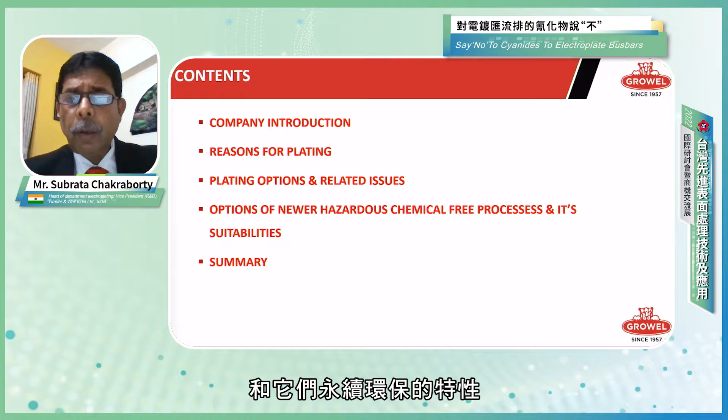Can you go to the second slide please? My today's talk will be outlined as: a little company introduction, reasons for plating, different plating options, and wherever there is an option, there are some issues as well. So we'll highlight some of the issues and the options for newer hazardous-free chemical alternatives and their suitability, followed by a summary slide.

Our company is situated in Mumbai, head office in Mumbai, with factories at different places, and we have 5 verticals. It was born in 1957, so more than 65-year-old... it's a company with 76 million USD sales turnover, with 35% market share for the GMF range of chemicals. We are an AS 9100 certified company with more than 1100 employees and associates working with us.

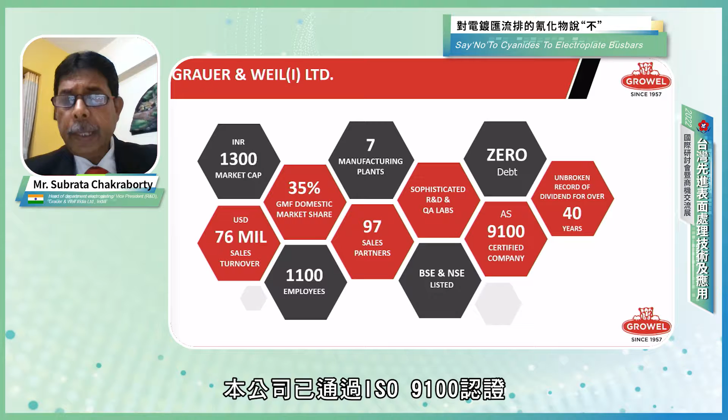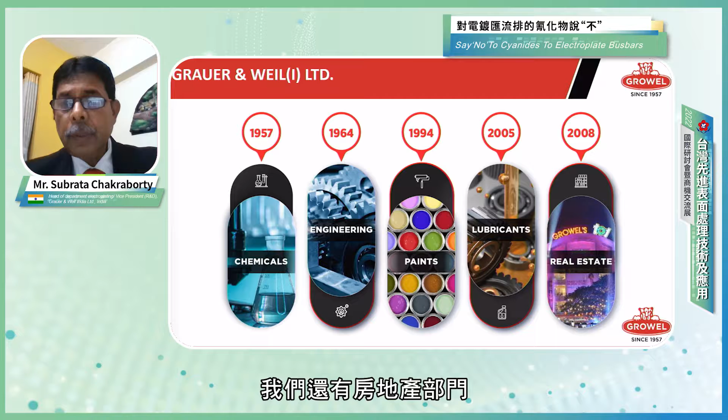These are the different verticals. In 1957, the chemicals business was the cash cow of our group. Then in 1964 we started engineering divisions supporting electroplating and associated waste treatments and other processes. In 1994 we acquired a paint company, a related diversification, and also introduced lubricants associated with metal finishing. We also have a real estate division, with a beautiful mall in Mumbai.

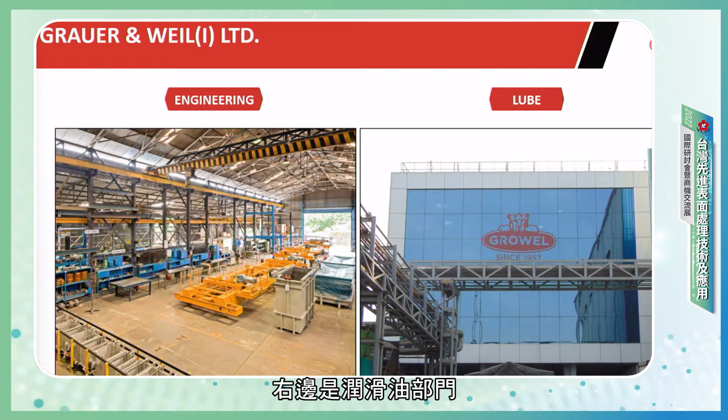We have more than 1100 direct and indirect employees on direct payroll with skilled personnel. Of these, 900 are technical personnel and 200 are in support functions. More than 70 people work in R&D and QA for process development. This is a short introduction about our company.

Next please. We have 2 overseas offices, in Thailand and Bangladesh, and different channel partners for both India and global supply chain positions. So this is about our company background. Now I'm moving forward to the next slide.

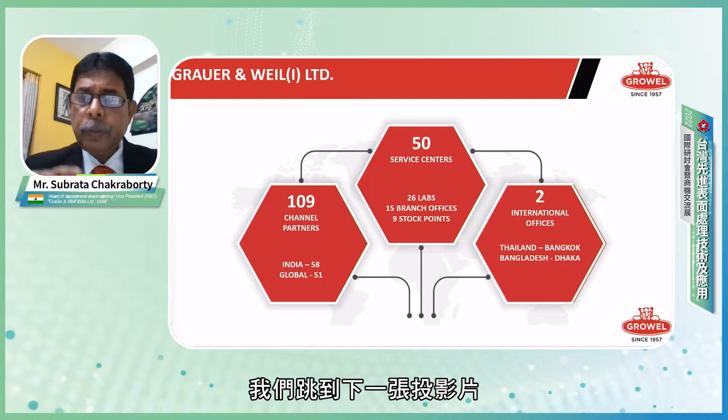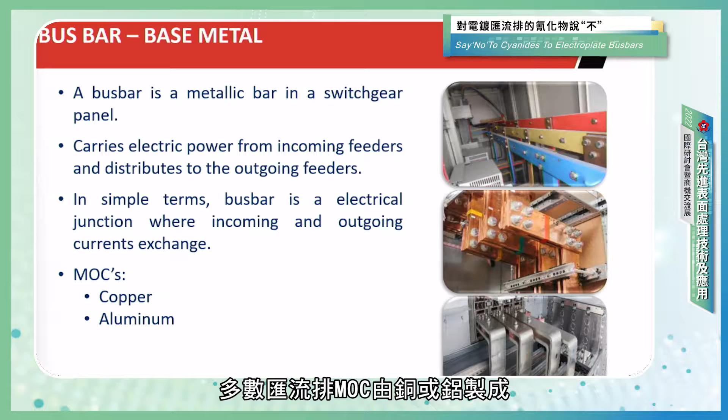This will give us a little background about the bus bar, what it is and where it is used. We are all aware that a bus bar is a metallic bar in switchgear panels, which passes current from incoming feeders to outgoing feeders. In simple terms, the bus bar carries the current, and most bus bars' material of construction is copper or aluminum.

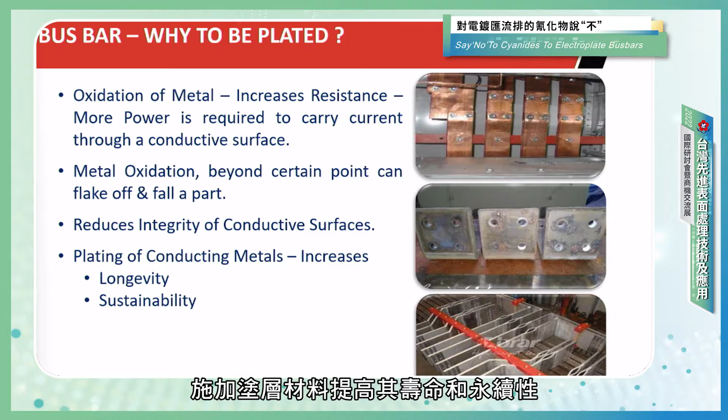The purpose is that it passes current, so if oxidation of the metal takes place, it will increase resistance. We then need more power and voltage to pass the same current, resulting in higher temperatures, and the carrying capacity will reduce. As a result we will see corrosion taking place, reducing the integrity of the conducting surfaces. To resolve this, one good option is to apply coating materials for longevity and sustainability. Let's see what the options for plating are.

It will be copper, silver, or tin, depending on the application, because whatever coating we apply should have good thermal conductivity. That is the most pertinent choice for the coating, so the best in line will definitely be silver.

Some cheaper substitutes are also doing only tin plating, with an undercoat of copper.

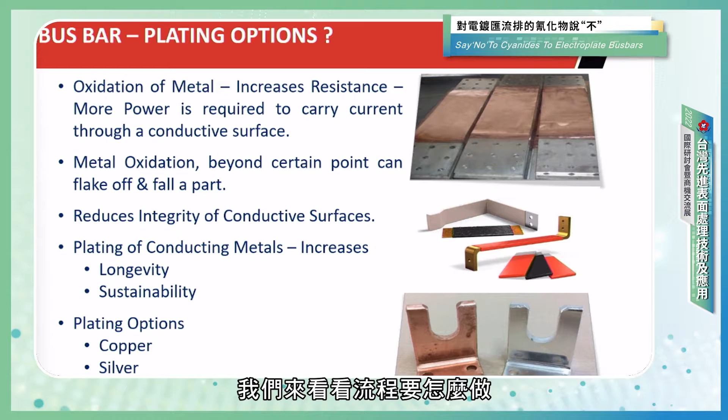Let's see about the processes we do. You can see some photographs of the plated components. This is the normal process sequence industry uses for plating on busbar while doing copper tin plating. It starts with soak cleaning, a specialized soak cleaning so that it doesn't age the base material aluminum. Then we have etching, then zincate 1, then desmutting, then zincate strip, and so on. Coming back to zincate 1, then zinc strip, then zinc 2, and then trying copper coating, and then tin plating, and then neutralization, passivation, and dry. So this is the process for copper tin coating on aluminum busbar.

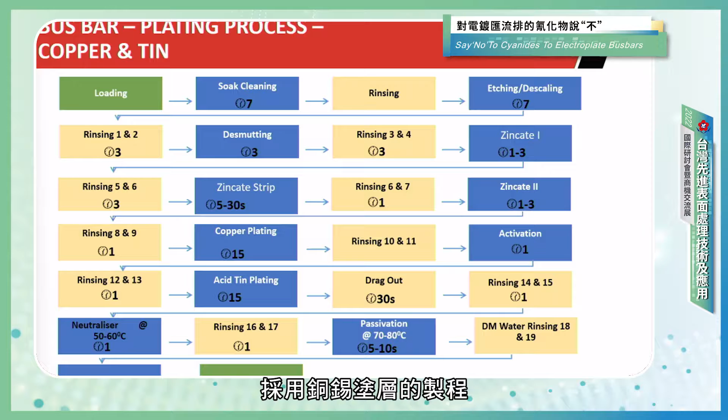Here this will have a copper silver variant. Up to the copper step it's more or less similar, and thereafter instead of tin they go to strike silver, main silver coating, followed by anti-tarnish and so on. This is the basic outline of the process sequence.

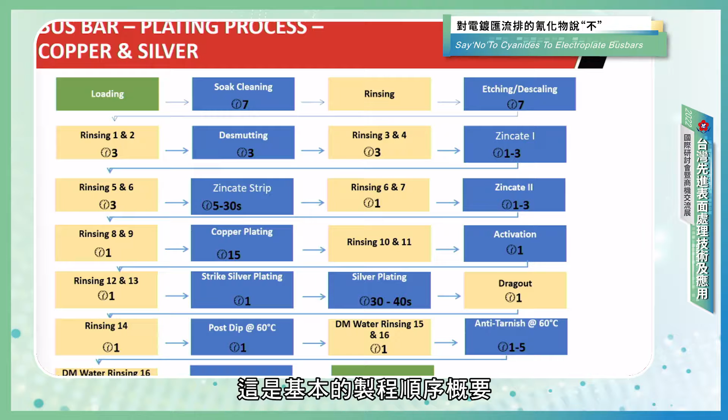Now let's see the challenges. As all of us are aware, in these processes like zincating, copper, and silver, the traditional processes contain cyanide. So our task is to replace cyanide for all the associated processes, so that we can make our entire process cyanide free. At the beginning, the main challenge was to find a suitable substitute for cyanide, because cyanide is a well-established ligand and gives very stable complexes with most metals.

Silver is so noble, with a standard electrode potential of positive 0.8, so thermodynamically it is very noble. But in the presence of cyanide, it forms silver cyanide as a complex, with a log K value around 21. This provides a very stable complex, and over the years it has become totally established, and people know how to use cyanides. But we all know the issues associated with using cyanide.

The choices for replacement of cyanides that we considered in our company were that the complex or ligand should not be toxic, and it should not create very harmful breakdown products, so that subsequent waste treatment of the generated waste would be easily treated and recycled wherever possible. So these were our basic approaches.

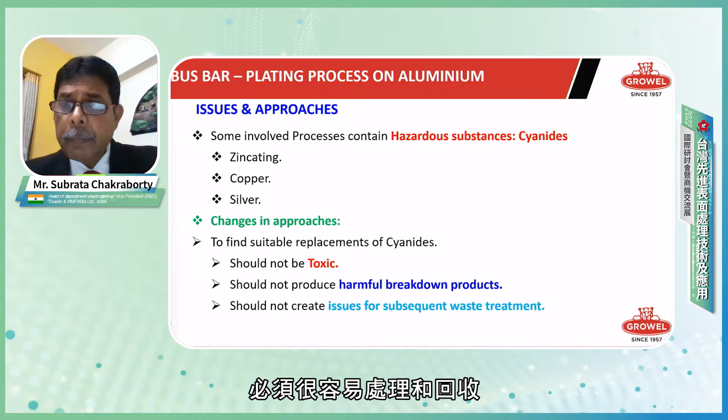Starting with the zincate coating, the conventional technology, as I said, contains cyanide as a complexing agent to hold alloying elements like iron and copper in solution. Because we are all aware, the zincate coating is in an alkaline media, and in alkaline media these comparatively noble ions like iron and copper tend to precipitate out. Therefore, cyanides are used as stabilizing agents to keep them in complex form.

The traditional process mainly contains zinc, caustic soda (NaOH), and cyanide - sodium cyanide or potassium cyanide - in the formulation. As a result of this zincate coating applied on aluminum, we get a zincate top coat which will be either zinc-iron alloy with zinc approximately 97% and iron approximately 2%, or zinc-copper with zinc around 86% and copper around 14%. This is normally the composition of the coating in traditional processes.

But what we have done is remove cyanide from the usage. Instead of cyanides, we have used non-cyanide organic complexing ligands, mainly dicarboxylic acid, or sometimes acids with even more carbon atoms - let's say quadra or hexacarboxylic acids - along with a cationic polymer and some multi-cation.

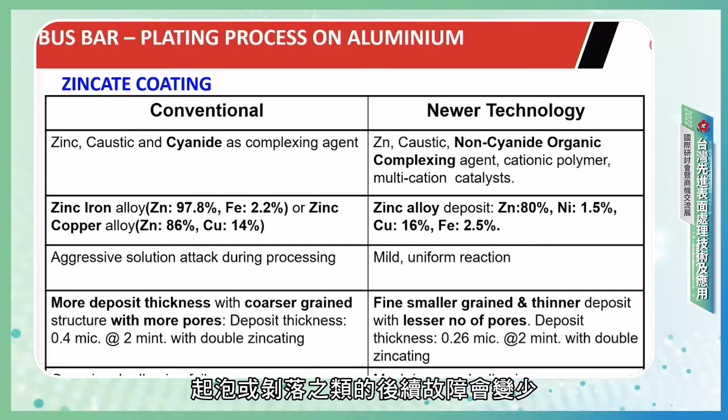Furthermore, being a true zinc alloy consisting of nickel, copper, iron, as compared to the traditional processes binary alloy of zinc and iron or zinc and copper, this is fairly less corrodable. For example, if we go from the zincate to subsequent coating processes, this deposit has less tendency to strip off at the contact surface or component touch surface. So it improves or ensures the subsequent deposit adhesion. With the newer technology, we can get better adhesion, so subsequent failures like blisters or peeling off get reduced.

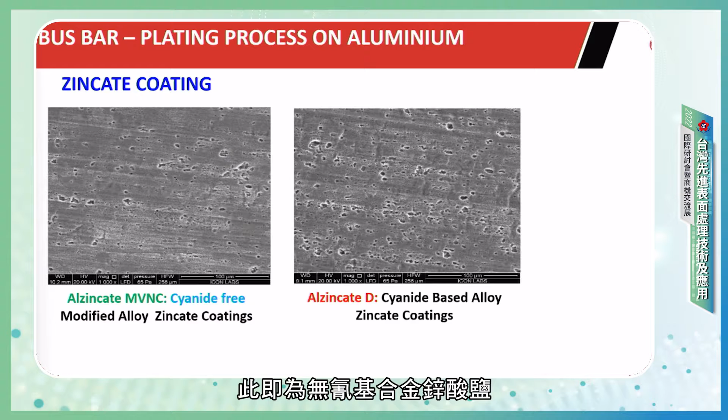This is the SEM photograph of zincate coating. What you're observing on screen is the aluminum surface followed by only zincate coating. You can see there are a lot of pores on the right hand side deposit, whereas on the left side the deposit pores are much lower. The left side coating contains Alzincate MVNC, which is the non-cyanide based alloy zincate.

Moving forward from the zincate coating to copper coating. We know there are three processes for copper coating: cyanide, acid, and alkaline. So on zincate coating, obviously the choice is alkaline ones, either cyanide or alkaline.

With the different options of copper coating, we have some issues. For example, in case of acid coppers, copper remains in +2 state, and copper's electrode potential for copper to copper 2 is plus 0.34, whereas iron is minus 0.44. So thermodynamically, copper is less active than iron, and there are always chances of getting copper metal deposit on the MS. This gives an immersion coating which is not very stable or adherent to the base. After deposit, if I just scratch it, that coating gets peeled away.

So this is an issue. Therefore, on a component like MS directly, acid copper cannot be used. Whereas when we talk about cyanide or alkaline copper, the metal remains in complex form, not as only single Cu 2 plus state as it is in acid copper. As a result, it changes the potential value and makes it more conducive for plating, and we don't get addition on the base, particularly on aluminum. So if we use either cyanide or alkaline copper, it doesn't give much issue as far as metal precipitation or immersion coating is concerned, and we get an adequate strike coat or base coat for subsequent deposition.

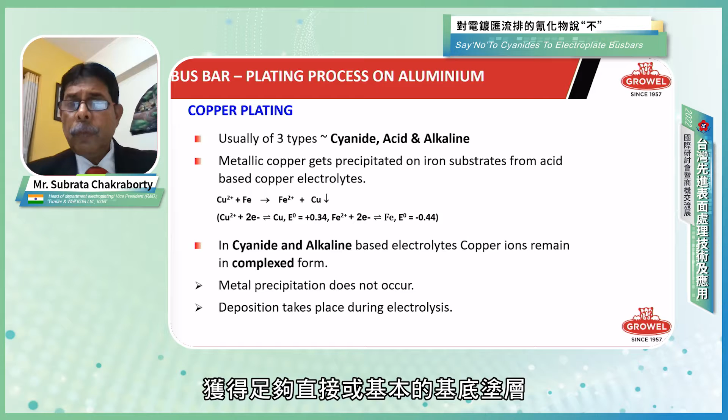Now we are not talking about cyanide copper, since it is well established and we are all aware of it. So what are the options? We have pyrophosphate based copper and phosphonate based copper. Both processes have some advantages and disadvantages.

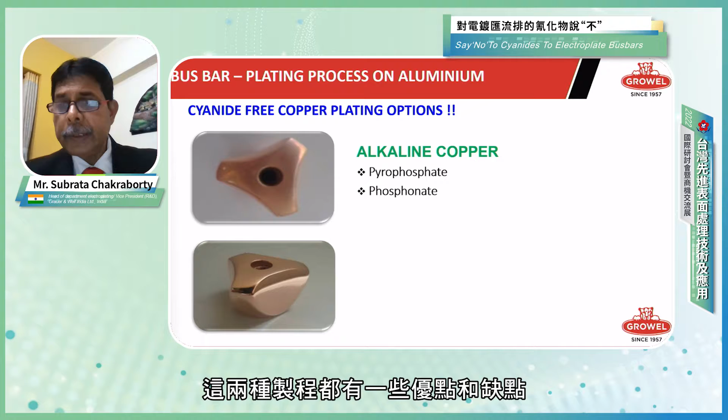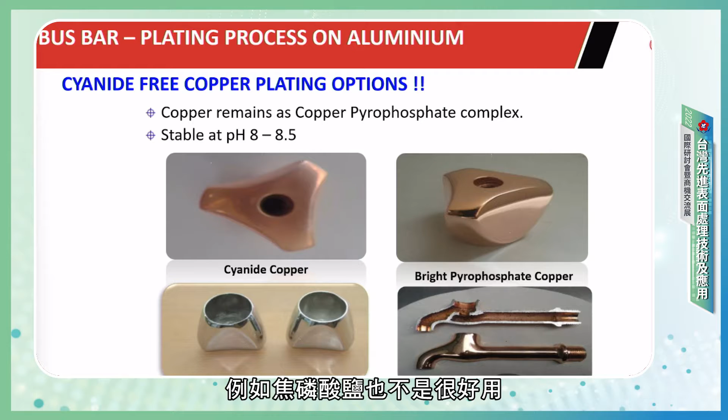But pyrophosphate is associated with some issues. For example, pyrophosphate is also not very user friendly with respect to waste treatment. And the most important thing is that the pyrophosphate ion has some tendency towards hydrolysis, forming single uncomplexed copper. If you have uncomplexed copper, there is a possibility that we might get immersion copper deposit, and as a result we will not have good adhesion. Why does this hydrolysis take place? Because in the pyrophosphate complex, you can see there is an oxide linkage, and this oxide linkage makes the complex a little vulnerable towards hydrolysis.

Furthermore, as we discussed a little bit about waste treatment, the concern about eutrophication is also possible with pyrophosphates, because they help generate plantation.

So if the water body gets contaminated with more pyrophosphate ion, there is a possibility that we might get a lot of generation of plants on the upper surface of the pond, which can eventually take oxygen out of the water, reducing the dissolved oxygen. This can create problems for water bodies like fish and other elements. So therefore, pyrophosphates are also not very user friendly.

So then our option is the phosphonate based process. Here you see it is very similar to pyrophosphate, but the advantage is we don't have the oxide linkage as we have seen with the pyrophosphate ion. So there is no chance of hydrolysis as we just discussed. Therefore, phosphonate ions are far more stable, and our process is also based on that. So there is no chance of hydrolysis.

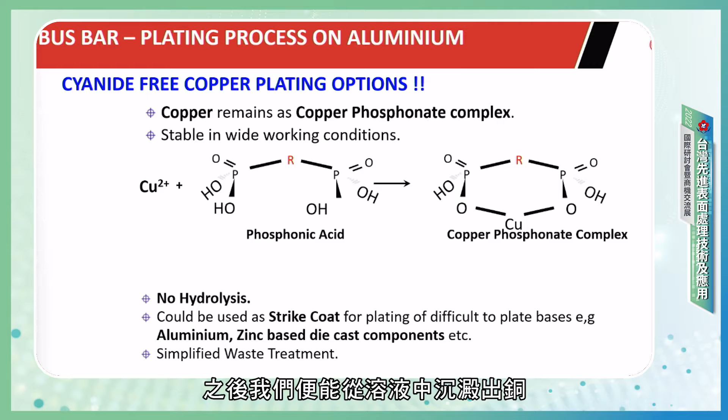And here one point has to be noted, that the process is designed with mixed phosphonate and some organic carboxylic acid as a complexing agent. This makes this process a second generation system.

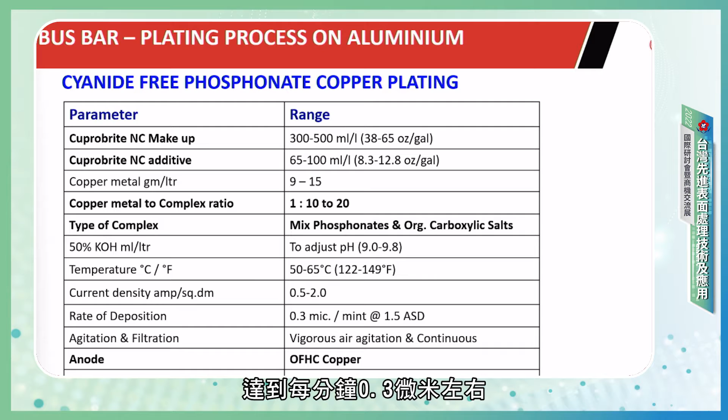In the first generation system, we had issues about very low thickness - maybe around 0.12 micron per minute at 1.5 ampere per square decimeter, whereas now we can get around 0.3 micron per minute at 1.5 ampere. That's one advantage. And I will show you one more advantage when we see the cross-cutting photographs of a heat-treated aluminum busbar component. So please keep your enthusiasm, I will discuss that at that point of time.

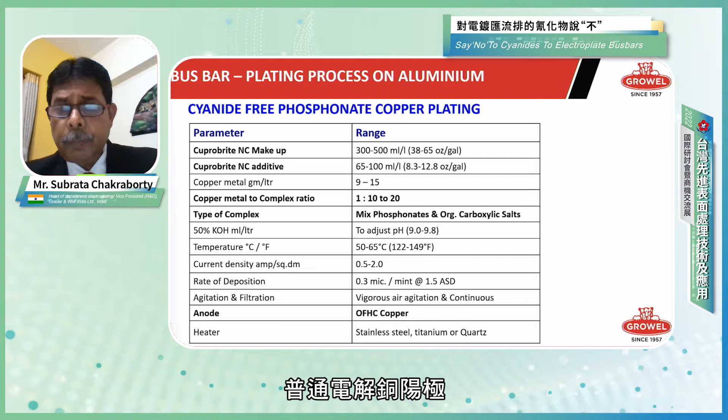So this is one advantage, and we need to maintain this metal to complex ratio at 1:10 to 20. Very excess amount of complex is also not desirable. So we should maintain somewhere between that 1:10 to 20 ratio. Another important thing is that we need to use oxygen-free high conductive copper anode in place of normal electrolytic copper anode, which is popularly used so far with the cyanide-based system.

Okay, this is the Hull cell test results of cyanide versus non-cyanide. We have to tell you here that with alkaline copper, we are bound to get lower thickness. If anybody wants to switch over from cyanide to non-cyanide system, it is always advisable to increase or create an option to increase the plating time rather than increasing the current density. Current density should not be used much higher. So the best in-line current density will be 1 to 1.5 ampere per square decimeter.

Why we are getting lower thickness is that in case of alkaline copper, it remains in +2 stage, and it complexes with the corresponding ligand, in this particular case phosphonates and some organic carboxylic acids. During electrodeposition, copper +2 has to get reduced to copper +1, then copper +1 gets reduced to copper 0 to deposit copper as metal.

So there is a two-step reduction process. For each 1 coulomb passed, actually 50% of that, maybe 0.5 coulomb, will be used only for deposition from Cu+1 to Cu0. So we eventually get lesser deposition. Whereas in case of cyanide copper, it remains in +1 form, so it's a direct one-step reduction. So each coulomb of electricity passed will have approximately twice the rate of deposition compared to alkaline copper.

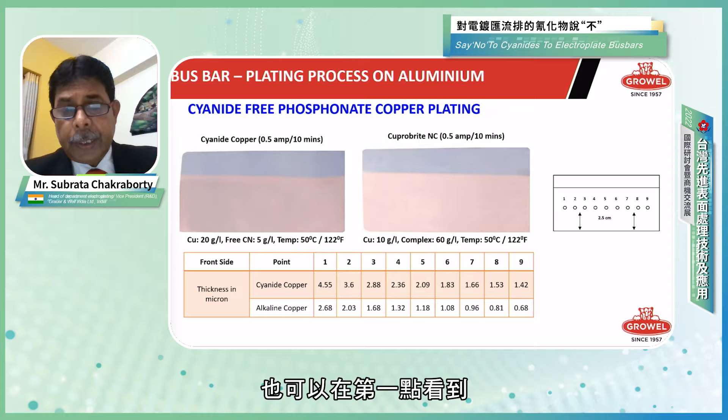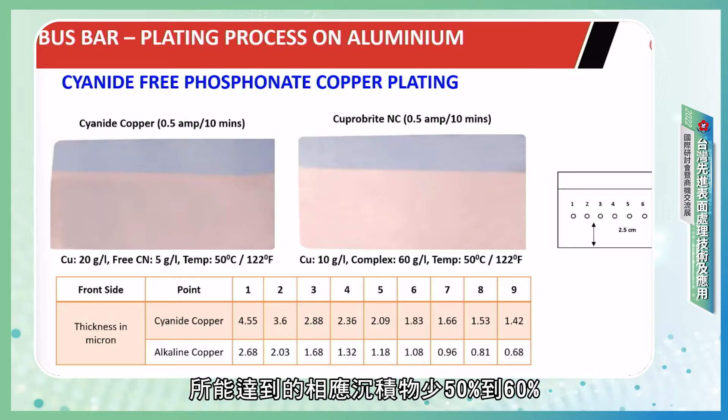This can be seen here also in point number 1 - these are the different points. It can be seen here, this is the high current density zone, and this point 9 is the low current density zone. So at each and every point, within alkaline copper we are getting virtually 50 to 60% less than the corresponding deposit achievable with cyanide copper.

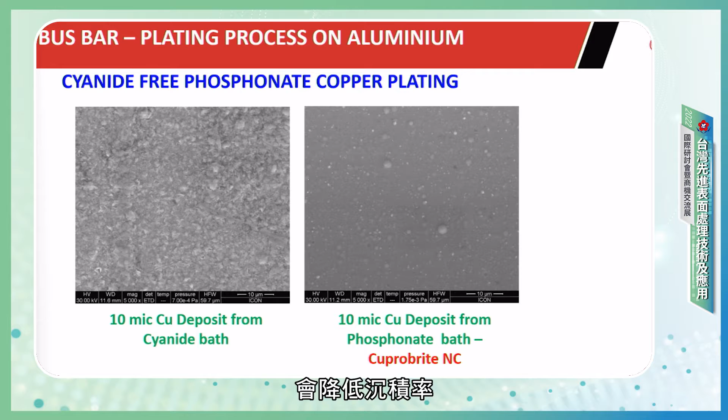If we use lower, there are chances of adhesion failure. If we use more than excess, it will reduce the rate of deposition, and furthermore it changes the surface topography also.

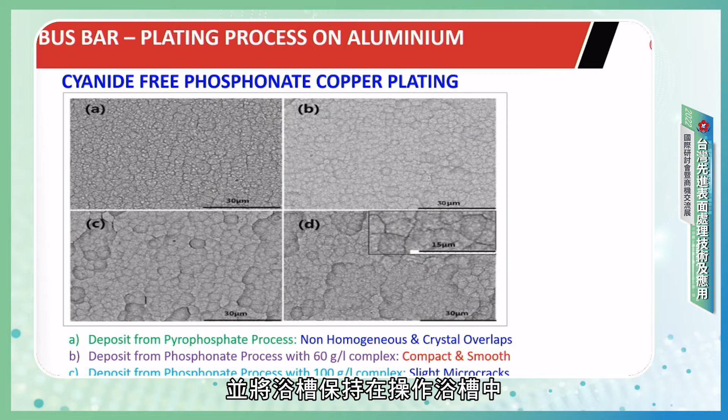If the cracks are more, there is a possibility of hydrogen entrapping more in that area, which could subsequently ooze away and create issues. So it is very important that we maintain the complex at the desired level, and it is possible because we can analyze this complex by HPLC and maintain the bath in the operating condition without any problems.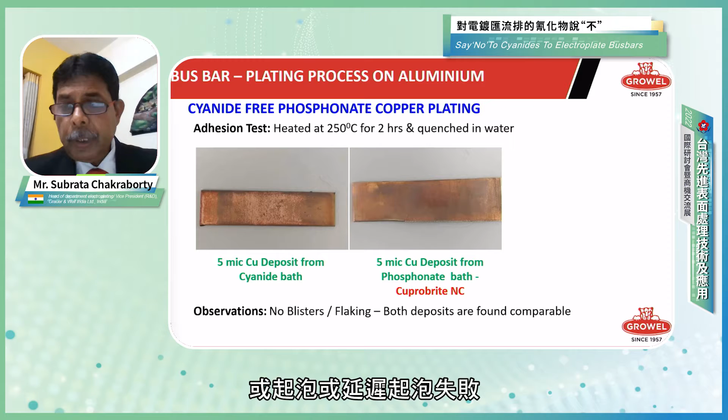Moving from copper to the next process in line, which is silver. Silver plating, we are all aware of why it is desirable. First and foremost, it is bright, lustrous, and cheaper compared to other precious metals like gold. It is also good and ductile with very high reflectability.

Because of its high positive potential, the chances of oxidation are very, very low. It doesn't form oxide like we normally see for coatings like zinc on MS, where we get white rust and so on. Such a thing doesn't happen with silver, so the coating integrity is much better.

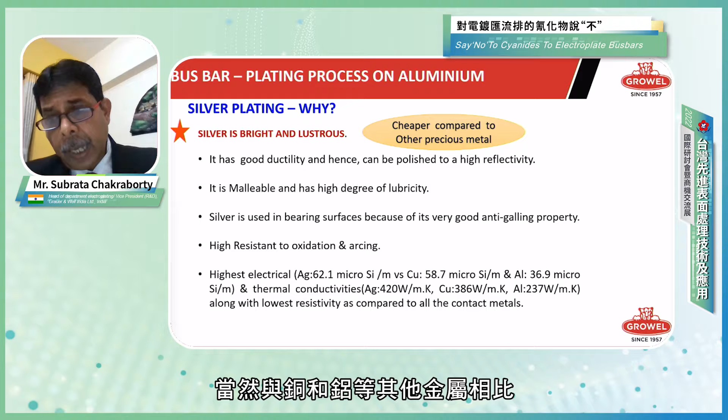It's malleable with a high degree of lubricity, so for subsequent forming or applications, this gives more sustainable properties to the plated components. We discussed that it is highly resistant to oxidation and also arcing, which makes this coating very useful for components like chip manufacturing, semiconductors and so on. It also has the least electrical resistivity compared to copper and aluminum.

This will give us a little idea about the evolution of silver coating. As I told you from the beginning, it is a very old process, established in 1840 by Elkington's et al. Subsequently, it is based on cyanides, and initially it was only for decorative applications, but subsequently it started being used for functional applications also.

Obviously, the solution contains potassium silver cyanide. Now, an important thing here is that we need to have free cyanide, meaning some cyanides remain as free ions, because in solution it doesn't remain only as silver potassium cyanide plus potassium cyanide. Whatever remains beyond that is the free cyanide. The free cyanide level has to be higher, let's say 120 grams per liter, to have proper stability of the solution and less anode polarization. Otherwise, it creates a plating problem.

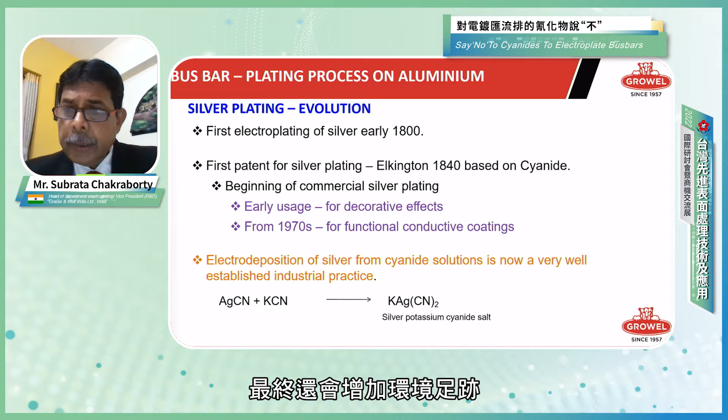So in short, what I'm trying to say is, if we use cyanide silver, even though it is very easy to use, the involvement required from the user is very high, because you need to take proper care while using it, and also for subsequent waste treatment, since the waste solution will contain a lot of free cyanides or complex cyanides. This creates a lot of hazards and ultimately increases the environmental footprint.

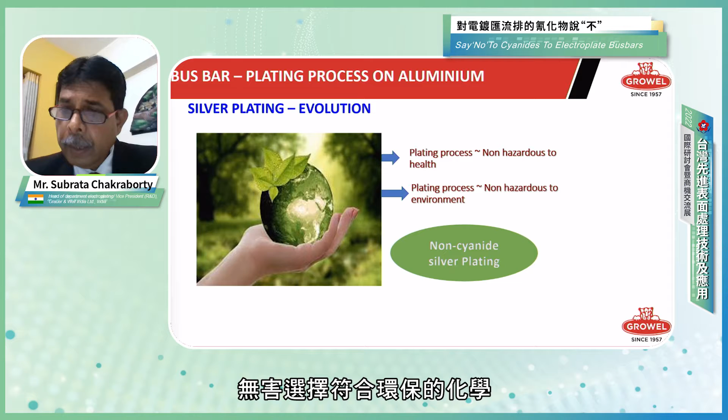There is a strong drive to develop non-hazardous options based on non-cyanide silver to have green chemistry. Any newer developments are associated with a lot of challenges, and we are all aware of it. Here also, there are a lot of challenges we encountered when we started working on this, from 2015 onwards.

First and foremost, the deposits were unsatisfactory in appearance. Even though sometimes we were getting some good results, it used to get tarnished within no time. That's not sustainable. Electrolyte stability was not good, because the complex or ligands we tried were not stable. We would get good results, and then maybe the next day that solution gave no coating at all, yielding to some precipitation and other issues.

There was a lot of difficulty with respect to bath maintenance, very much prone to metallic impurities. What was happening is that we were getting a lot of immersion deposit, because silver is very noble. It can lead to immersion coating on any of the substrates, because thermodynamically, silver is more stable in the metallic form. So from silver ion, there is always a tendency to convert or get reduced to silver zero, the metal itself. But these immersion coatings are not very stable, subsequently leading to coating failures.

Our strategy was to have a stable silver electrolyte that we can use for commercial purposes, and it should not lead to any harmful breakdown product, which is very difficult for waste treatment. With continuous usage, users know how to treat cyanide-based effluents. Whoever is using it, I'm sure all our associates will agree with me, you just remove the cyanides by chlorination, and then it is easy to precipitate the metals.

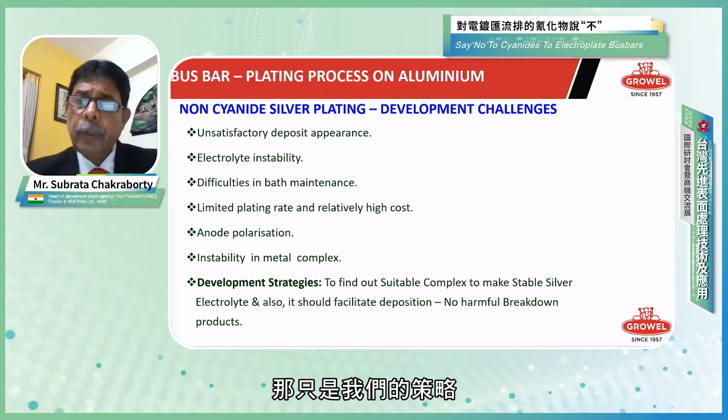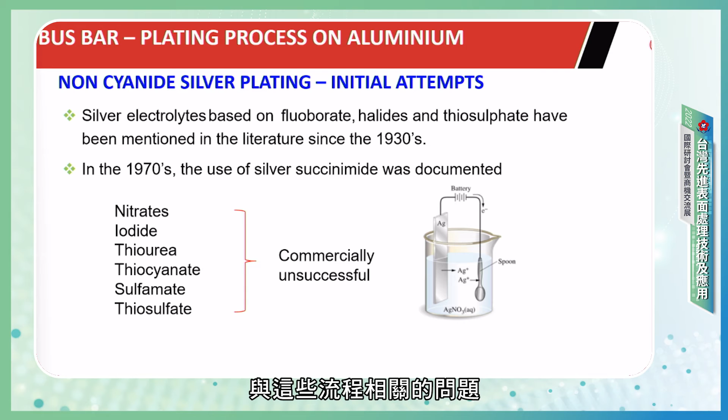Suppose in place of cyanide you use certain ligands which form an even more powerful complex, that is not desirable. That was our strategy. A lot of different ions were tried: fluoborate, halides, thiosulfates, which are mentioned in the literature. We started using succinimide, triethanolamine, thiosulfate. These are also known to the industry, and there are some primary literatures available with some information. So we started working on it and encountered some issues with the different processes. Ultimately, those were not commercially successful, and we saw a lot of issues associated with these processes.

So this is our development in this particular space, and we have developed our own complex. This process consists of silver in complex form, along with some stabilizers and some conductive ions, and so on and so forth. It is alkaline, and this complex doesn't create a very powerful bond like if you use a metal with EDTA, which would be very difficult to get rid of in waste treatment.

The ligand contains nitrogen, carbon, oxygen - it's got N, C, O in different combinations, so there are different types of complexes. We'll have some amount of impurity ions and co-deposited ions, for example carbon, nitrogen, oxygen in the deposits. We'll talk about that. But ultimately, the process is alkaline, cyanide free, and can be used for industrial as well as decorative purposes. You can get bright to semi-bright silver deposits. For busbar coating, it is very, very successful.

Now we were talking about complex formation. In the previous slide, we discussed that succinimide was one candidate. So silver succinimide complex was one of the powerful candidates to replace cyanide. But when the silver succinimide complex remains in usage or idle time, the succinimide ion tends to get hydrolyzed and decreases the pH. It forms a slightly acidic residue, and that acidic reaction product reacts with the alkaline material, causing pH fluctuation. Obviously, the solution requires frequent pH adjustment by adding suitable alkali like ammonia, and so the stability becomes a question mark.

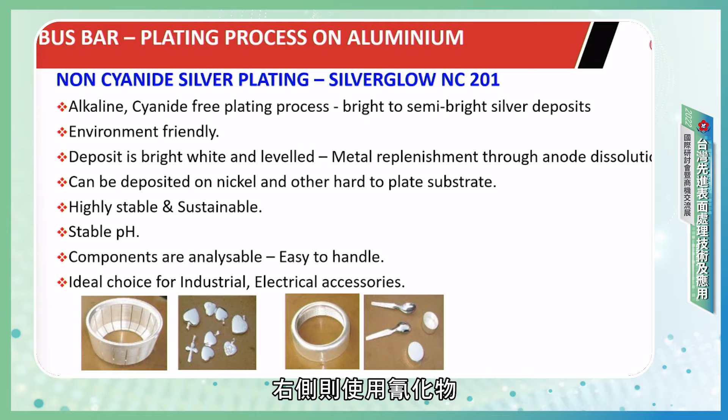This can be used for all types of components, for electrical or decorative items, for both rack as well as barrel plating applications. So you can see the component photographs on the left side, which is with the non-cyanide, and on the right hand side is the cyanide. This is the small pilot plant type operation.

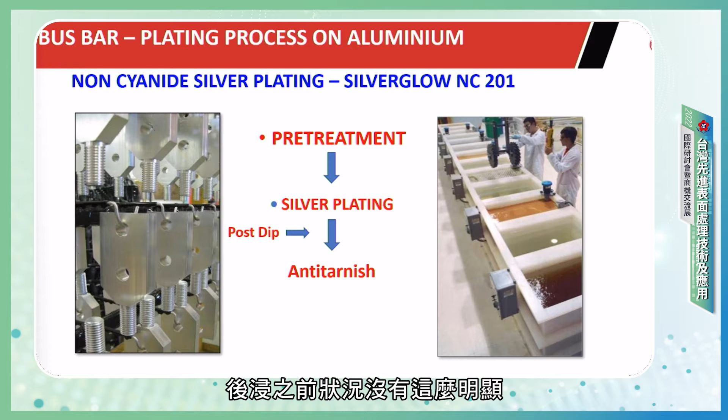But here one thing is important: after silver plating, one should apply the post dip followed by the antitarnish treatment. This post dip makes the component brighter. Before post dip, the situation is not that lucrative. You can see that without post dip, the panel or component looks bluish in appearance, but with the post dip, we get a brighter appearance.

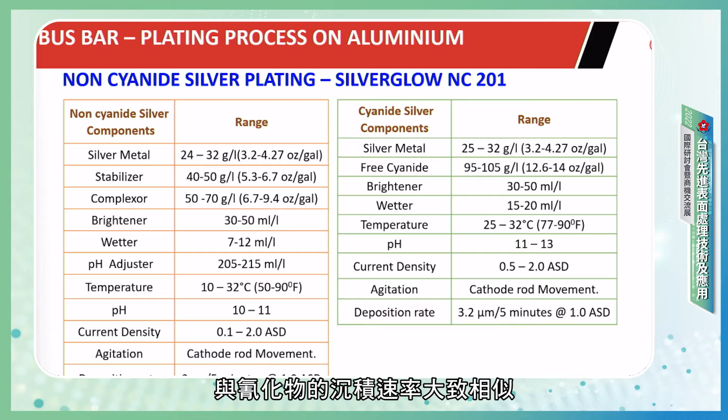This is the composition of the solution in comparison to the cyanide-based one. You can see that the metal works in more or less the similar range, so it doesn't create any additional burden in terms of waste treatment. In fact, it will be much easier than cyanide-based waste treatments. We are getting approximately similar rate of deposition as that of cyanides, which is also good for the industry.

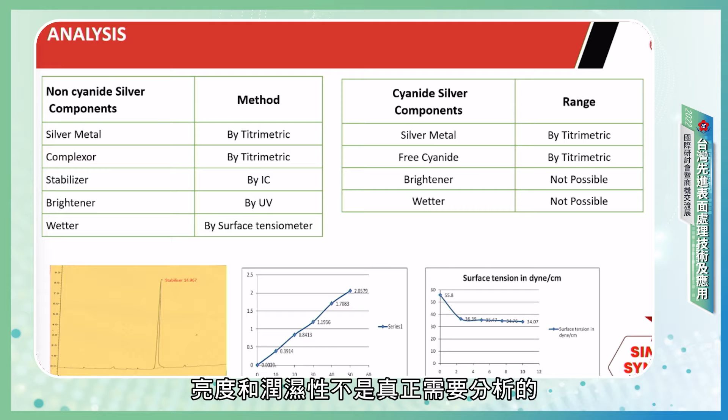What we have done over here is we checked the deposit characteristics in terms of the color of the deposit, which is done by the well-known test method using LAB test values, with colorimeters like Minolta.

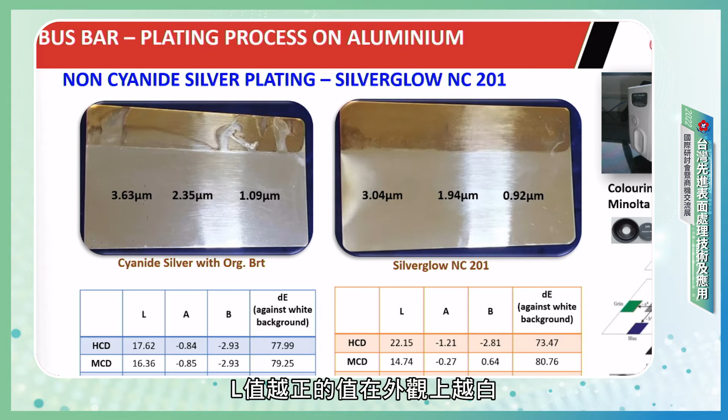I'm sure all of us know this is the L, A, B axis. Now if you go to this side it is black, and if you go to this side it is white. So a white color deposit will give an L value approximately 99 or even 100, and black will give you the negative side, and similarly A and B axis represent different shades. So in short, a more positive L value means whiter.

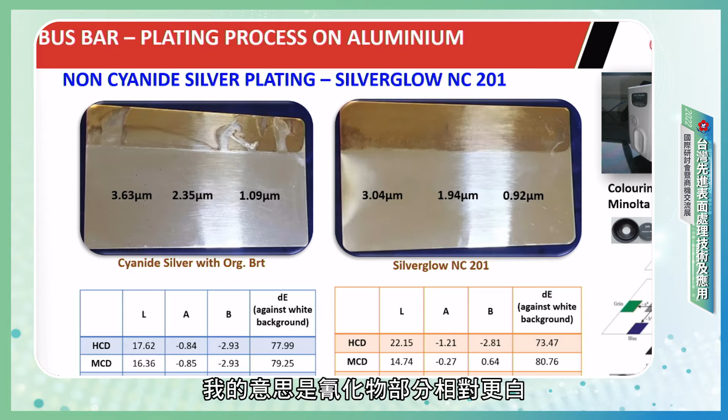You can see that with the same Hull cell panels, we checked the gloss meter at 85 degree angle, and we see more or less similar light reflection. So with cyanide and non-cyanide it's in the same range. From a brightness point of view, I would say they are comparable, and in some cases, by altering the brightener, we can even make it a little better.

Thickness is also mentioned over here. You can see it's more or less in the same range as cyanide silver. What we have done here is made a Hull cell test of a solution prepared in the lab, and that solution was maintained for more than 6 months. So from time to time we analyzed the thickness, and it is presented here along with the Hull cell characteristics. Now you see this is the initial, front and back side, and after 3 months, this is the front and back side.

Please make a point that the slight burning on the high CD is tolerable, there's no problem, and it doesn't create any problem as far as the components are concerned while carrying out the actual production.

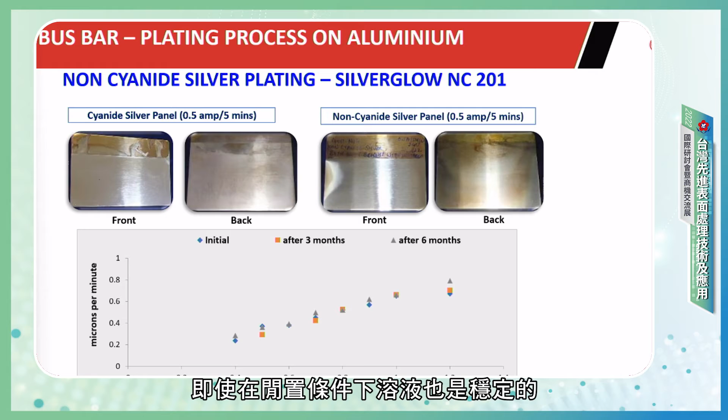Now here you see this comparative thickness chart, in this case micron per minute. So it is more or less similar and maintained. What we are trying to say is that the solution is stable even in idle conditions.

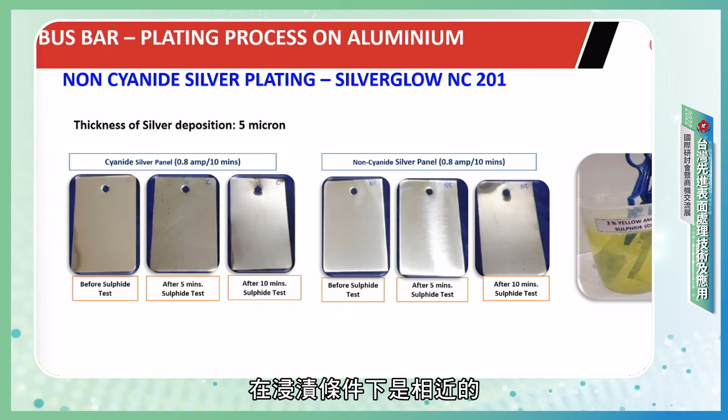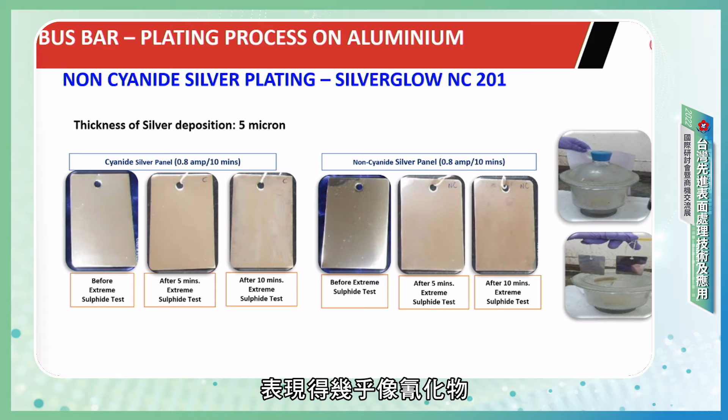Now let's see the second one. Here we have done the same experiment, but in this case we have kept the components in a desiccator with the sulfide solution, saturated sulfide solution in the bottom, so the atmosphere remains with more sulfur. We saw that with cyanide and non-cyanide, we don't have much of an issue. So what we are trying to say, as I mentioned in the beginning of the process introduction, is that our process is behaving almost like cyanide in terms of tarnishing resistance, which is important for any deposited silver coating. This will give us an idea about different tribological properties of the coated materials.

Now you see that hardness we have checked. 15 micron deposit with 50 gram load, non-cyanide silver is harder compared to cyanide silver. The question could be asked, why is it harder? Basically the reason is that we have seen the coating characteristics, the coating texture, it has fine grains, even finer than cyanide. So if the crystallized structure is smaller, it will have a compact grain structure, which results in higher hardness.

And since it gives a harder deposit, the Taber test wear resistance is also better. We have seen with a 15 micron deposit, 500 gram load, CS-17 wheel, after 300 cycles of rotation, the loss is around 16.9 milligrams as against cyanide's 20.8. So in terms of Taber wear index, the non-cyanide deposits are better.

Stress of the deposit, what we have seen is that it is much more stressed compared to the cyanide silver. The reason is that the texture of the deposit has a lot of voids compared to cyanide, and if you see under TEM analysis, we can see a lot of voids, and those voids trap into the deposit, which eventually absorb some impurities, for example hydrogen, carbon, nitrogen, because we discussed about the complexes. From that complex we get some nitrogen or oxygen, carbon, and of course from the electrolysis of water we get hydrogen and oxygen. So there is some trapping. Those impurities also increase the stress, and some lattice defects are also responsible for the higher stress.

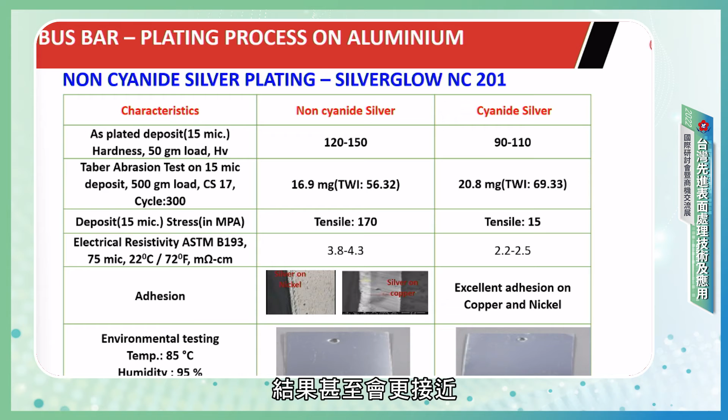One thing here I would like to mention is that the cyanide silver I am referring to is a deposit which is free from any additives, so it is dull with no additive system. If you use an organic system, you will be in this range. But if you use a metallic type brightener containing some selenium, it will even go closer to this. So this is another important characteristic. But if we heat treat it, there is absolutely no problem.

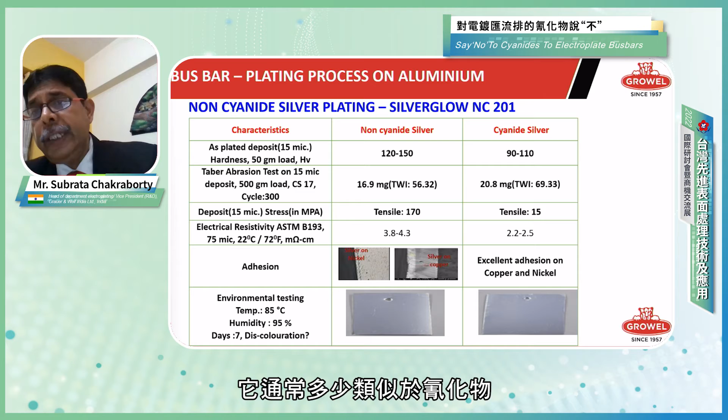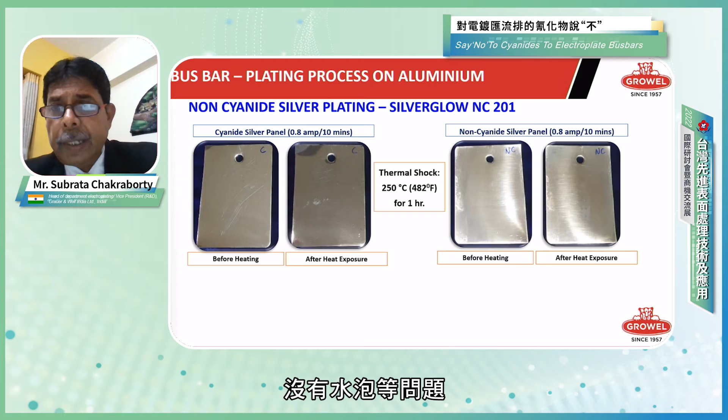Here we can see the adhesion. I will show you in the subsequent slide also. We have checked the tarnish resistance in terms of humidity testing, and we see it is normally more or less like cyanide. Here we made some panels with thermal shocking, and we see it behaves exactly like silver-based cyanide silver, so no problem of blisters and so on. In fact, heat treatment makes it better in the coating characteristics, as it can reduce the hardness and even reduce the stress.

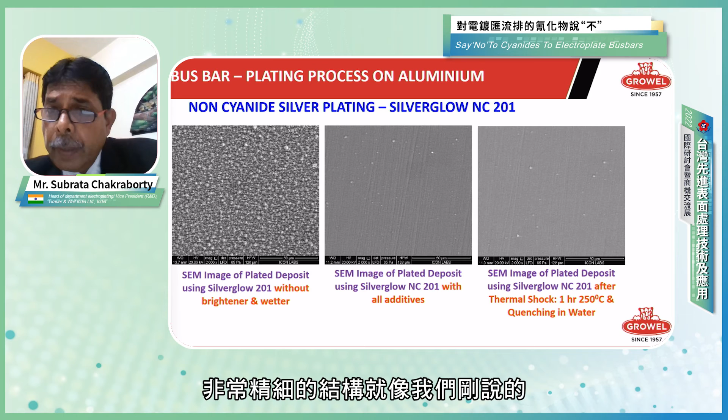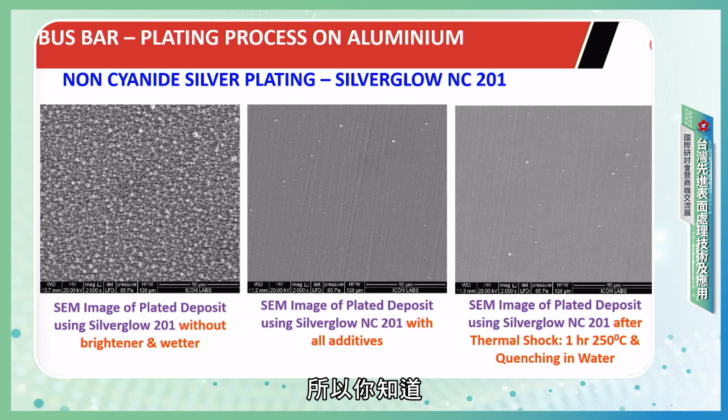This is the surface topography. This is without any brightening agents, and with the brighteners we get a very fine and compact grain structure, as we discussed. If we measure the grains, it varies between 450 to 700 angstroms, as against cyanide silver of more than 40,000. So it's a very, very fine grain deposit. This is after heat treatment, and we don't see any blisters.

So this is absolutely the desirable deposit we are getting. These are panels of aluminium at different stages: this is the base aluminium, this is zinc-coated aluminium, then copper-coated aluminium, and then silver. After that we did the cross-sections, and we don't see any gap between the layers, so we are getting the desired adhesion.

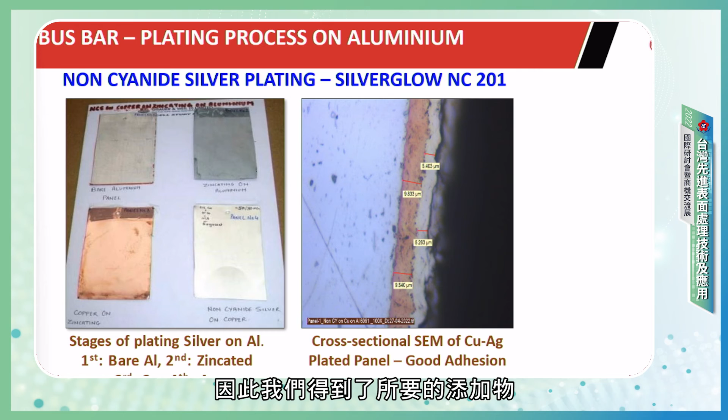Here we have done another cross-section figure. Here we have silver, and this is the copper. You can see the comparison we discussed in the very first slide, when we introduced our alkaline copper system containing the second generation with the mixed phosphonates. You can see in case of the first generation, there is a rupture in the coating of non-cyanide copper, whereas with the second generation coat you don't see such rupture.

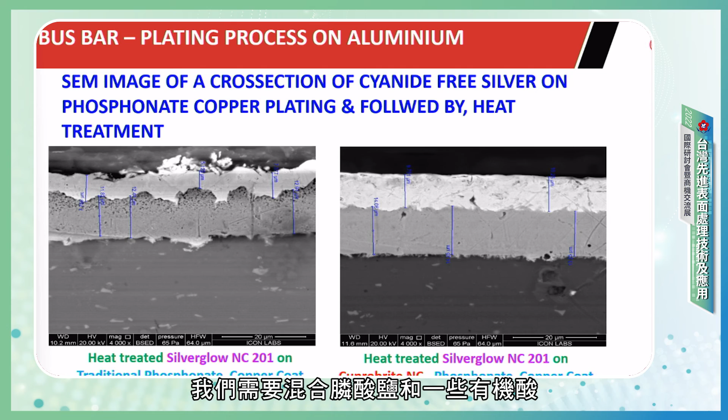I'm sure all of us will agree that if the coating deposition is lower by chance, and those components subsequently go for heat treatment, there is a possibility that the warping can take place on the upper layer of the deposited copper, and sometimes it can even touch the base material, so the coating fails. But with the Cuprobrite NC, with the mixed phosphonates and some organic acids, such a situation will not occur.

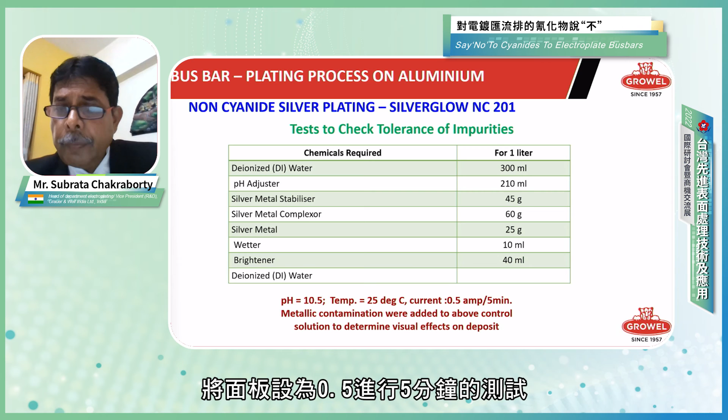Moving to the last part of our presentation, we tried to figure out the tolerance to impurities. We prepared a fresh bath, and checked the panels at 0.5 amp for 5 minutes in the Hull cell test, deliberately adding different impurities. Here you can see the effect of copper: 5 ppm, 10 ppm, 25 ppm, 50 ppm, and 100 ppm, deliberately introduced.

What we observed is that the bath turns bluish, darker, but the appearance of the deposit is not changing. One interesting thing is that somebody at the user level can even identify that the solution is getting contaminated with copper, just by seeing the change in appearance of the bath. But the process has tolerance where performance is concerned, up to 100 ppm, no issue.